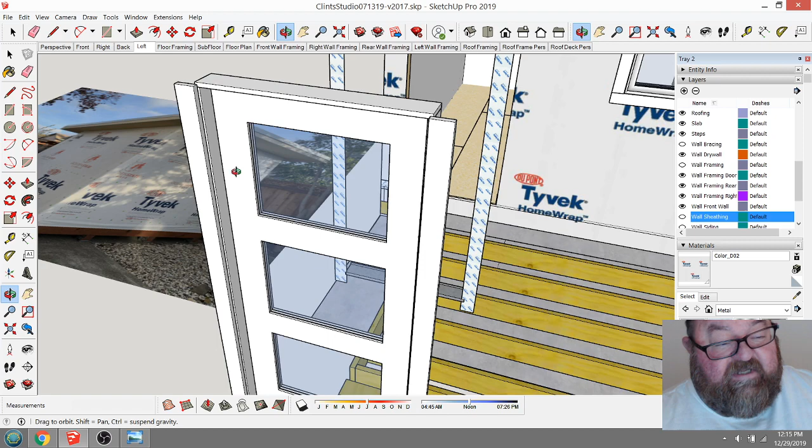A lot of these doors, like this Therma-Tru door, are very nice. It's fiberglass with a wood texture on it. Looks really nice, but it doesn't have nailing fins. We order these doors without trim on them, and we will put fiber cement 1x4s on there.

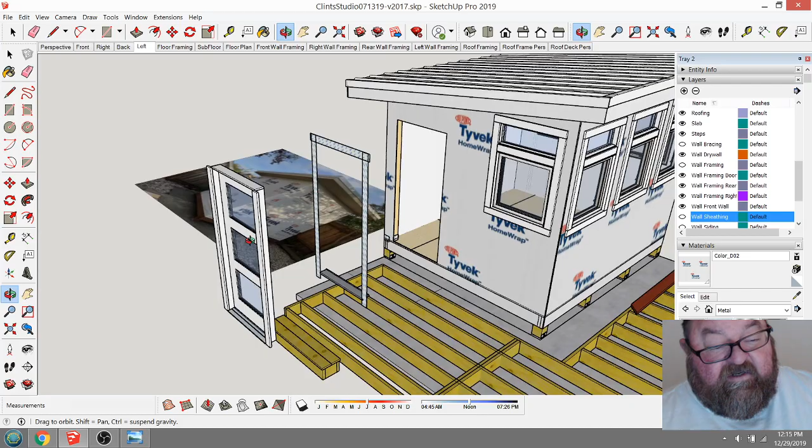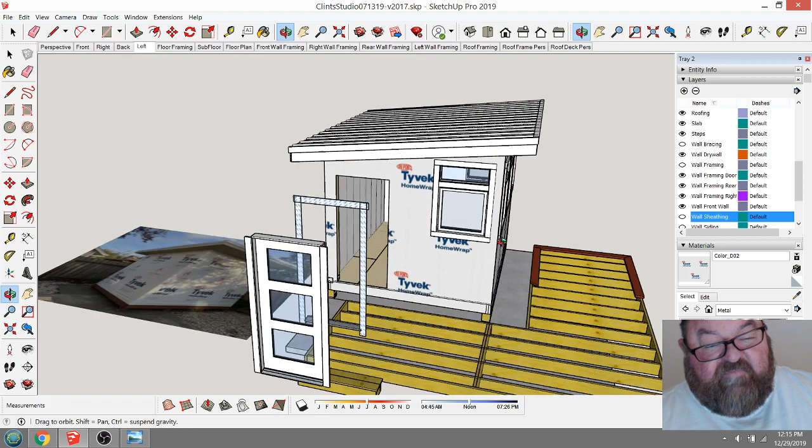This will all maybe be clear in a moment. I'm making this video for Clint. This is a project, and this is where he stands. It's an outdoor studio he's going to be using, and it's actually a little bigger than it looks. I've always been amazed how small it looks, but it's 10 by 12, the size of a regular office. So he'll have plenty of room, plenty of light, neat architecture.

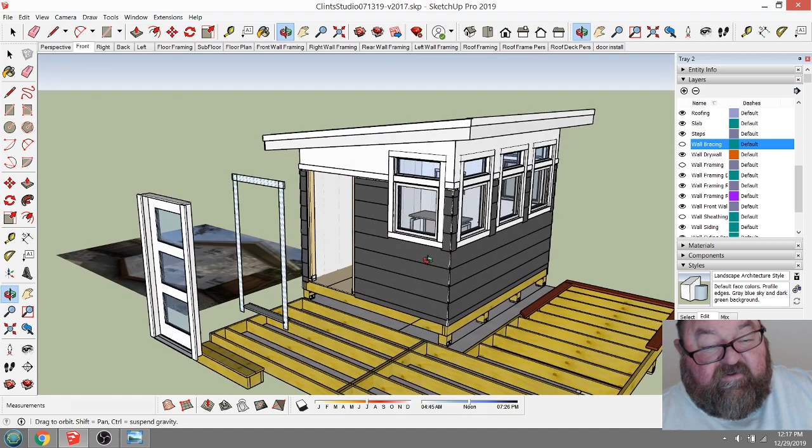So of course the door is not installed, but this kind of gives you an idea of what the siding and trim will look like. I just want to give you a rough look there at what it might look like. Now let's go back to our view.

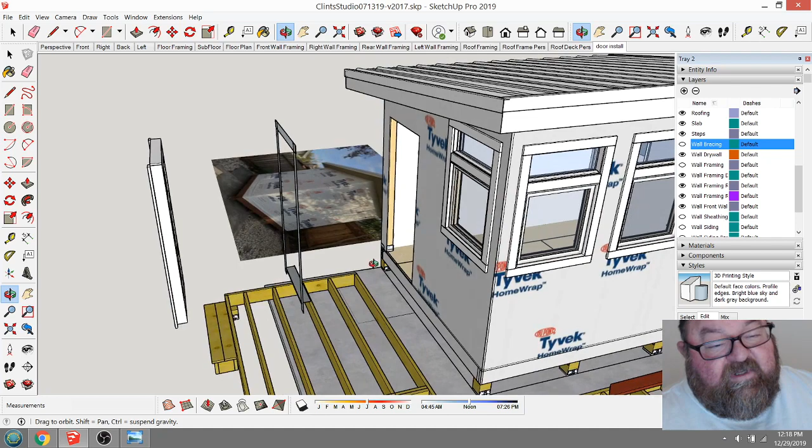So the issue here is, how do you install this door? And the short answer is there's three ways: the noob way to install it, the typical contractor way, and then there is the artisan way. I'm going to show you all three ways.

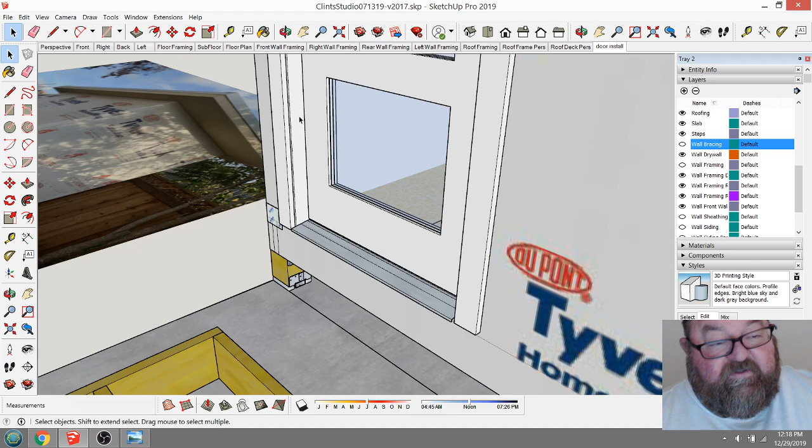A noob, and I'm saying noob because I'm just at a lack for a term, would just take this door and install it right on top of the subfloor. They would just slide the door in, put some screws in it, and put trim around it and go on. But that's not what I'm going to recommend.

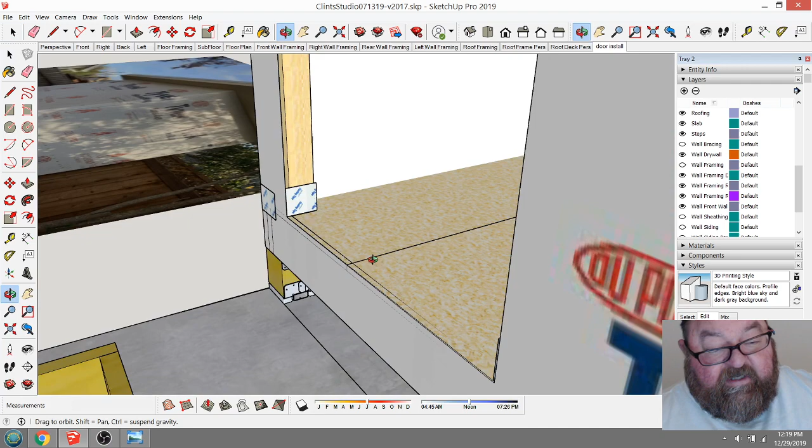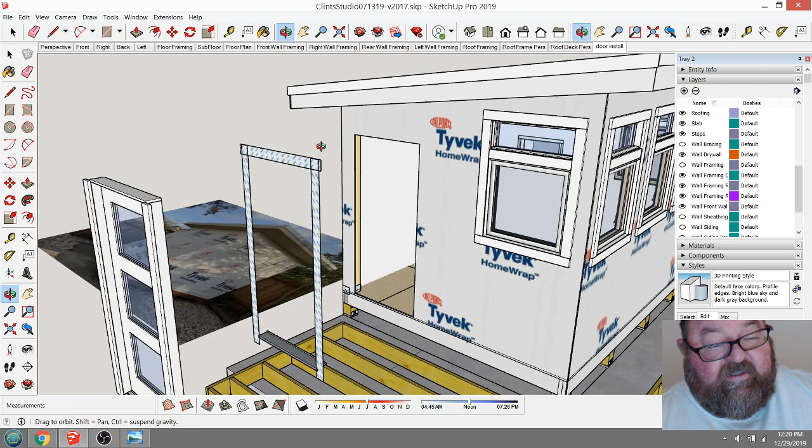The typical contractor method would be to just put some caulk here over the subfloor. Clinton has already got his Tyvek on, which he did a really good job of. This is honestly one of the most important things you can do, is get the Tyvek installed properly. Now on a door, the Tyvek tape is a little bit different. I'm going to show the windows in a different video. Clinton just wants to get the door installed, so I'm trying to help him out with a video for that.

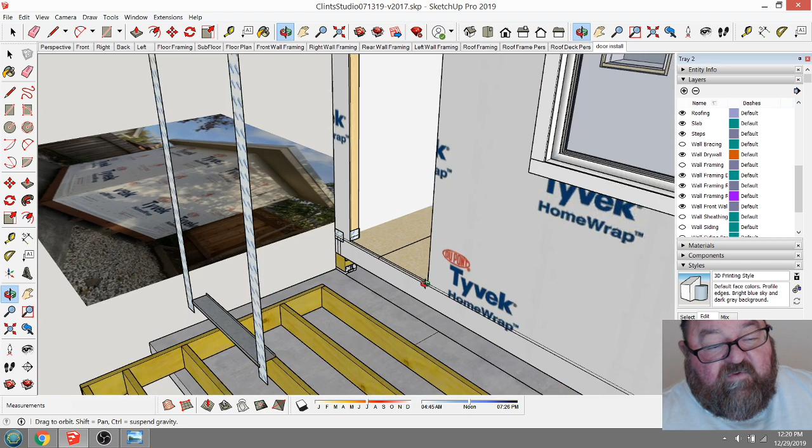So this is what I'm going to recommend, and there's actually two different ways you can do this, and I would consider both quality ways. The one way that's not exactly the artisan way, which I'll show you in a minute, is this method of taking the Tyvek flex wrap tape. Let me back this video up a little bit and I'll send you a link to this, Tyvek's video on how to do the flex wrap.

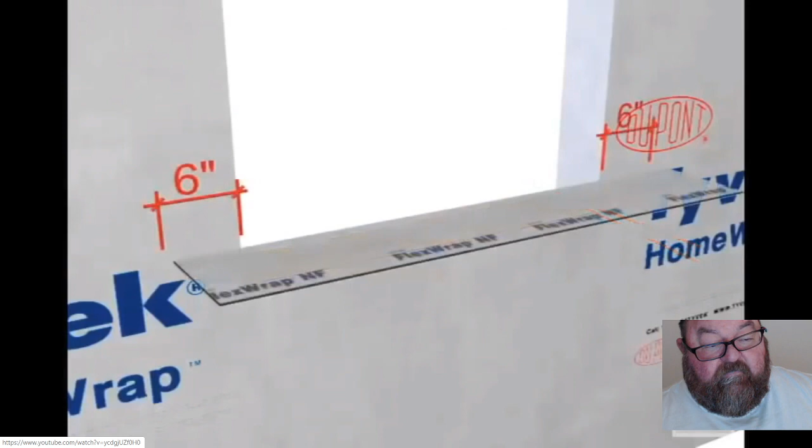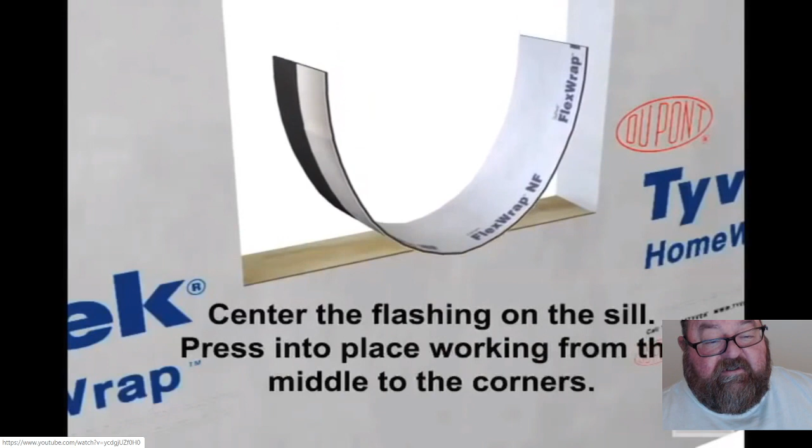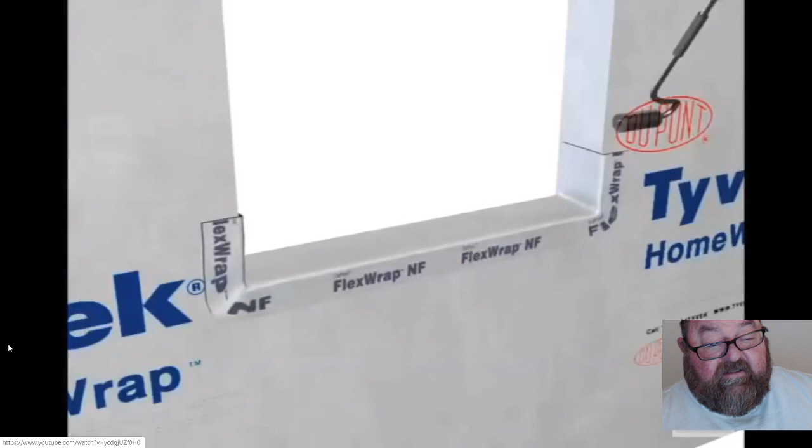So you just cut the flex wrap tape 6 inches longer on each side. It has a sticky back to it. You peel half of that off first and lay it in the opening. Then you take the rest of the backing off and press it. Here's where the fun starts: you take your hand and mold this corner, pushing it out first as far as you can, then molding it around the corner. It looks easy in the video, but it's not that easy, it takes a little practice. Then you take a roller and roll it like that. That's kind of the way that a decent contractor would do it.

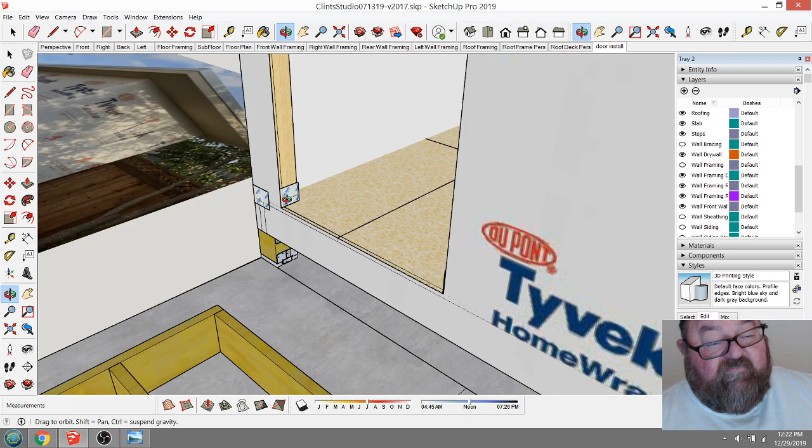Of course they're showing a window there, but you can do that, you can use that same product for the bottom of the door. That's better than not doing anything. And you can see remnants of my little tape job here. This one doesn't belong there, let me delete that one.

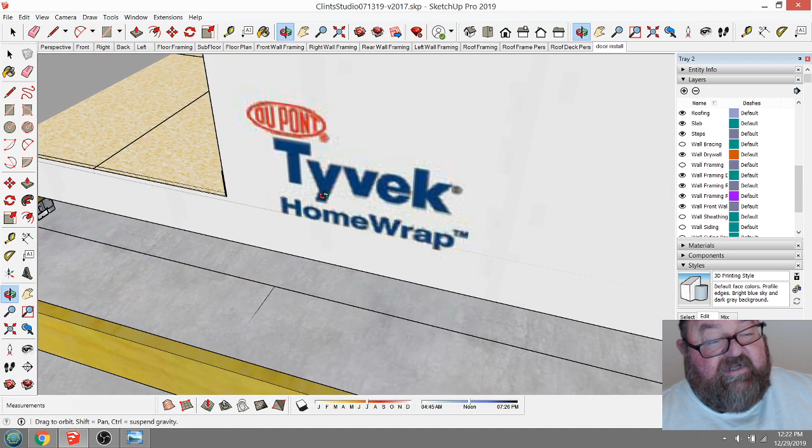One of the problems that we have with SketchUp is it will show lines sometimes behind a surface. So if you see this line across here, that's just something behind, a line ghosting through the Tyvek. This Tyvek is one continuous sheet, just like Clinton has it here. You did a good job with that.

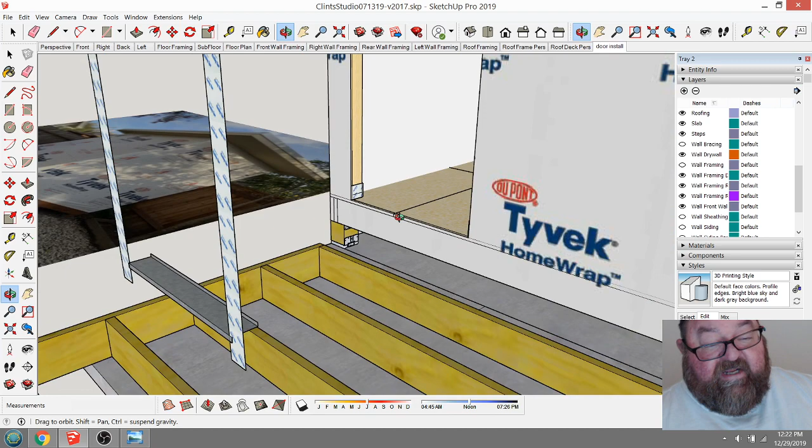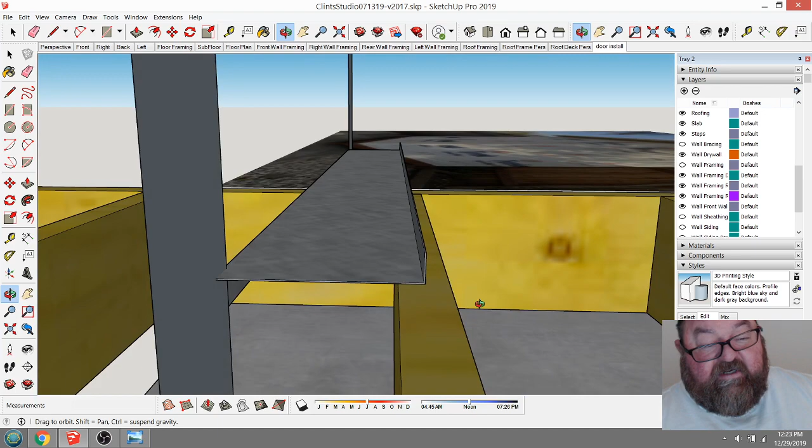So that would be your first option. The thing I don't like about that is that it's not really a pan per se. So what we do on ours, and this takes a little planning, is we have this pan made up from our local roofing and supply company. They have a sheet metal shop, and in a couple of days, if I send them a drawing with dimensions, they can make up this 26 gauge, and sometimes we do 24 gauge. I would recommend 24 paint grip galvanized pan.

And then that slides back into the opening.

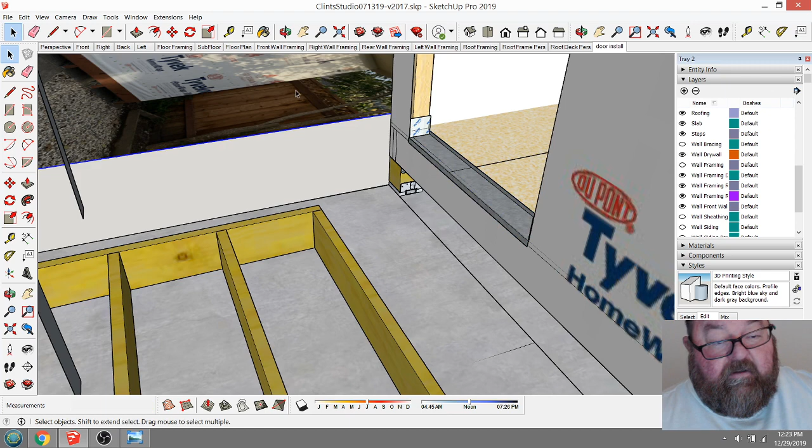Okay, so what that does is it comes out and laps over the Tyvek. Now when you cut this opening out on the bottom of the door, make sure the Tyvek is cut kind of flush. If you accidentally cut it too low, you can take a piece of Tyvek tape and recreate that bottom piece before you put this pan in there.

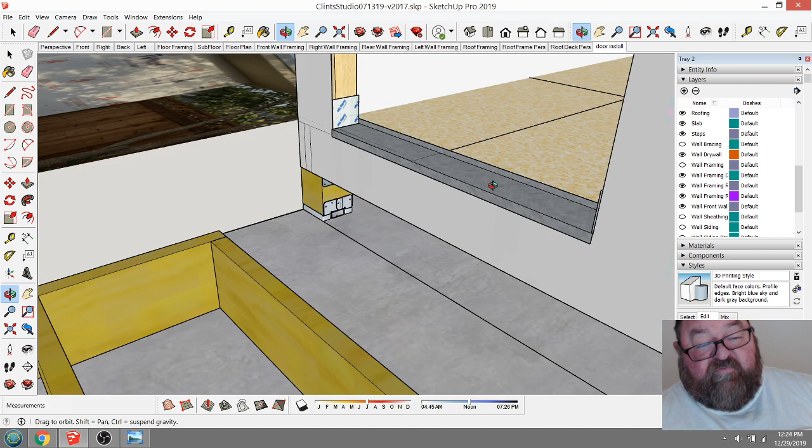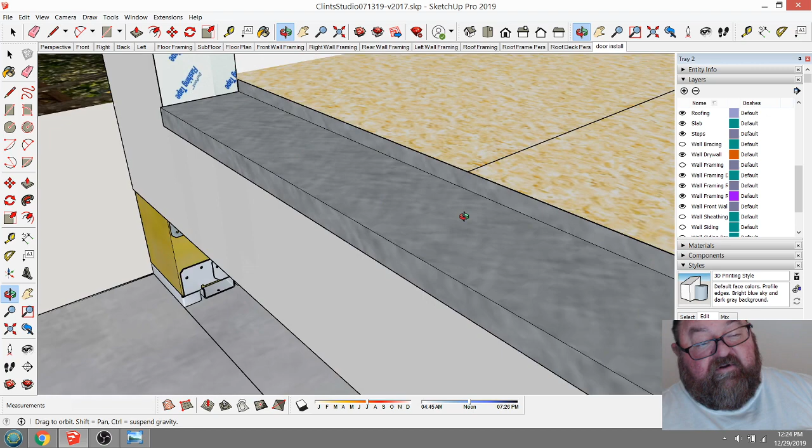Now the reason I like the pan is because it has this little leg on the back of it, so if water comes back in here, it can't go back any further than this. You can also use flex wrap tape and put a couple beads of caulk down through here, and that'll stop water from going back any further.

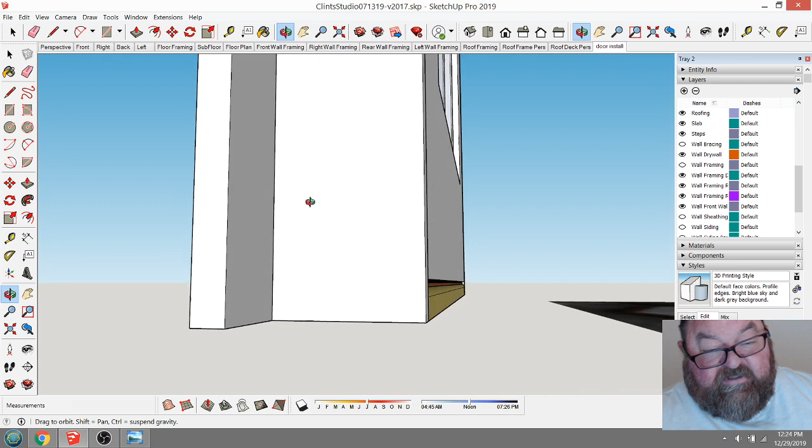But I really like this system. This is the way we've done our doors for maybe 10 years. The thing I don't like about the flex wrap is that these doors are kind of heavy, and they've got metal thresholds on the bottom - this part's metal, this part's wood. There's a composite material now they make these out of, they don't make them out of solid wood anymore. But you can actually gouge a hole in that tape.

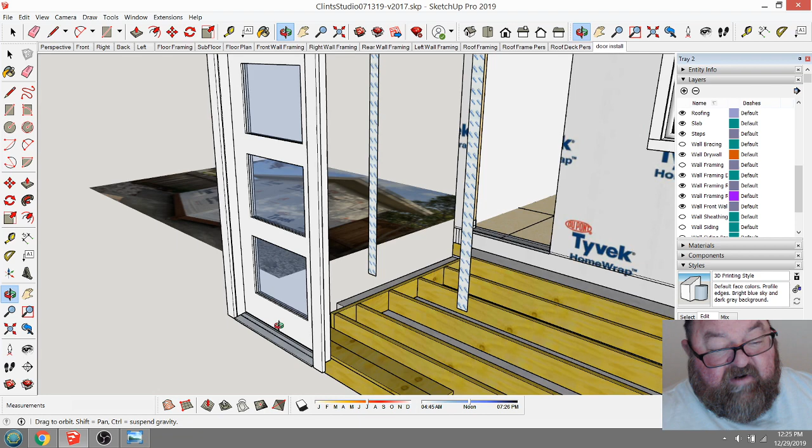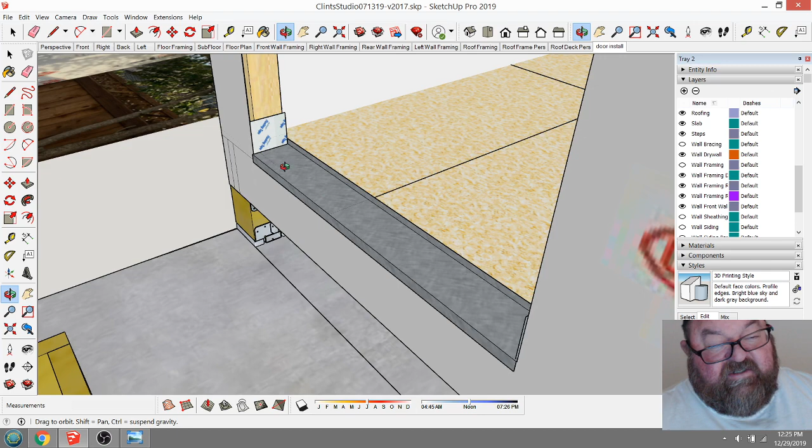Now if you're careful and you set the door in there nice and easy, and put a couple beads of caulk along the back to prevent water from running back - because I don't know how many times I've renovated homes where the owner wanted us to change out the door, we take it out and all the subfloor is rotted right there, because the contractor had done nothing but set the door right on the subfloor. I've got the deck pulled away here, but in a minute I'm going to push it back and show you part of the problems we run into with all this.

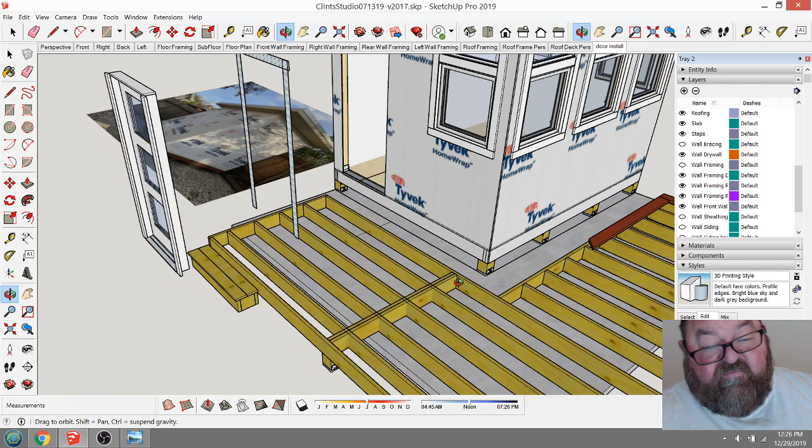And then I'm going to do another video just for the deck flashing. The flashing is a big deal, and really doing your flashing properly will add 100 years to your house.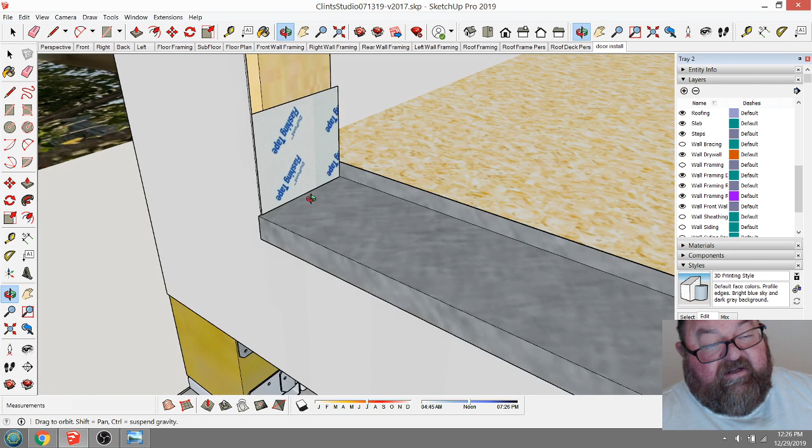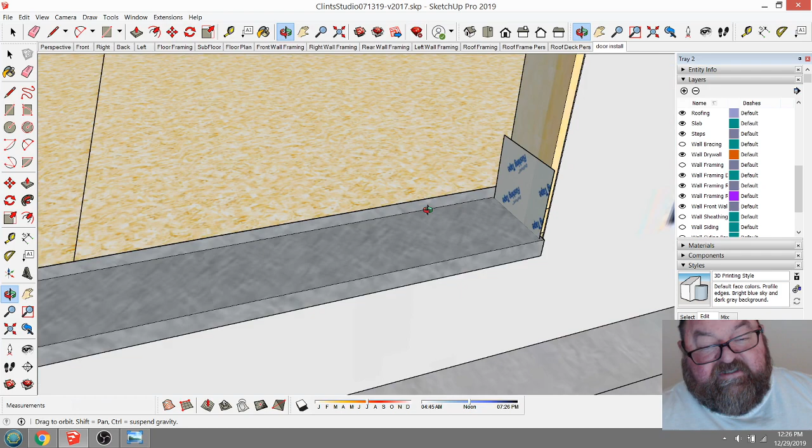So what I'm going to do now is create this little leg up on the sides - you can take a piece of Tyvek tape and put it here, then caulk this right here with some 100% silicone. In effect you've created yourself a little pan that you caulk, but you've got this leg coming up on the back. That goes against - I'll show you in a minute - the back of the door threshold.

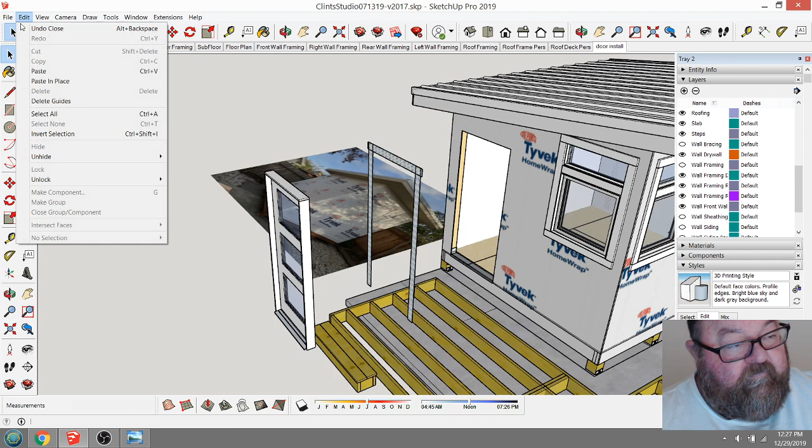So then what you would do is take this door trim off of it for now - actually, I'm not going to take it off, I'm just going to make it so I can set the door in place. I think I moved this out 10 feet, so if I move this back 10 feet.

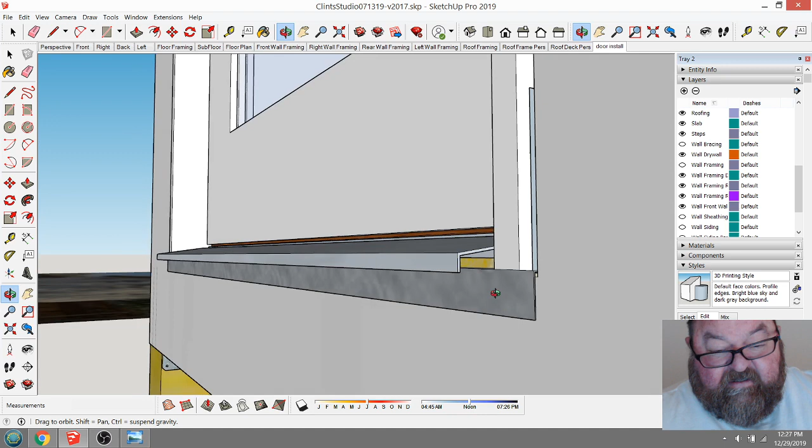So now you're going to set the door in place, and you can see that the door is setting on the pan and the threshold. This threshold, I downloaded it for this door - it's not 100% accurate, the composite material underneath comes all the way out to the edge, so there's not this void here.

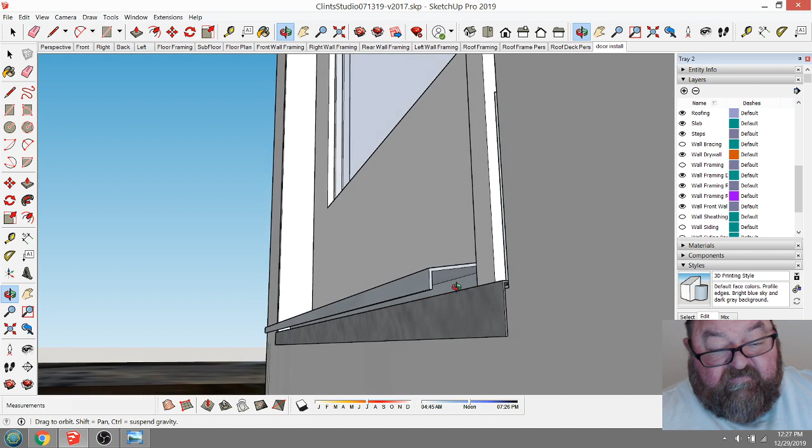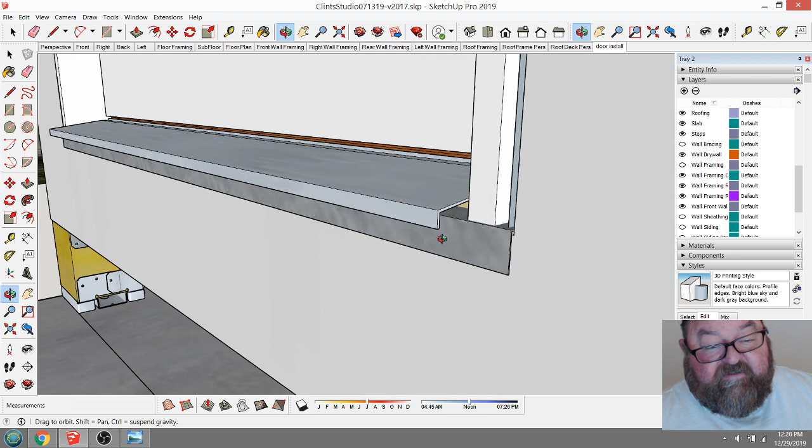So in effect what you'll have is this threshold sitting on top of your pan, and when the water comes and drips back, it'll hit that pan and drip down over the top of your Tyvek. You get the same effect if you use the flex tape - if you can get it in there and don't have time to have this 24 gauge paint grip galvanized pan made, you can use the flex wrap tape, just be careful when setting the door not to damage it.

So let's go in here, see if I can go inside and turn around - go in there, we go, without getting in the wall too much, and show you how this works. You see, now our pan is on the back side of our threshold. So water can't come back inside the house.

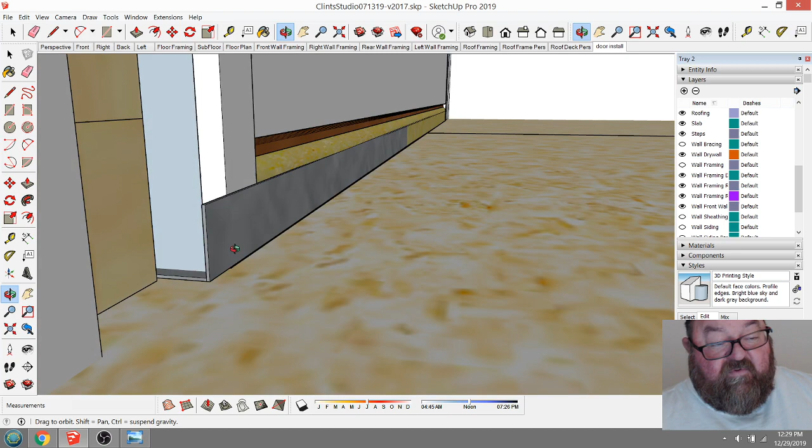Now this back leg is only 3/4 of an inch tall, so when you butt your wood flooring or whatever up against this, it won't show. If you're going to use a 12mm laminate in here, just make this leg a little bit shorter - it could be a 1/2 inch or whatever. You just need some kind of vertical up leg here to keep the water out. And you see that's the back side of our pan on the corner.

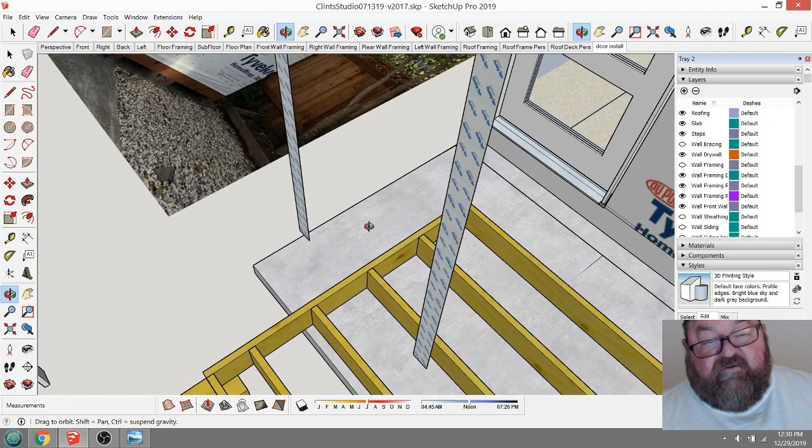Okay, so you don't even need to caulk this on the inside because you've got all this protection. Trust me, that 24 gauge or even 26 gauge - I like the 24 gauge - but either way, you're not going to have any leaks that way.

I'll show you what happens in a minute with all this water and stuff. So then, because these doors don't have flanges on them like the modern windows do, we're going to take Tyvek tape and make us a flange.

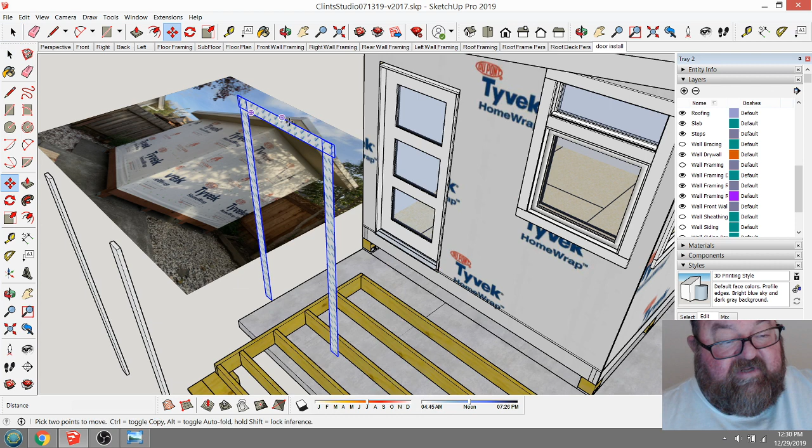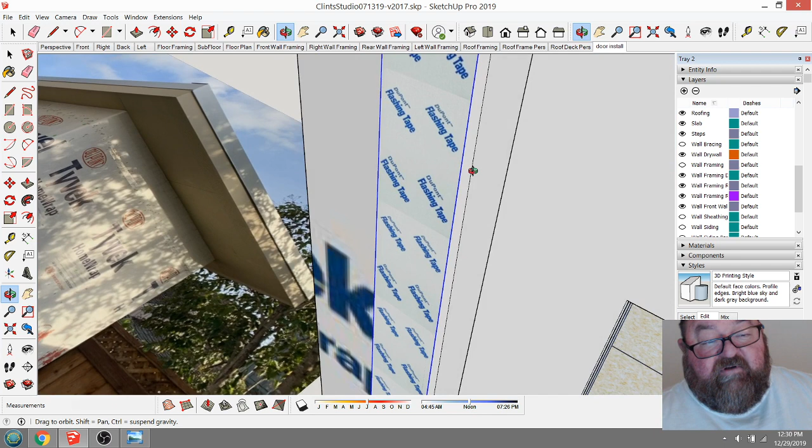Let me see if I can move this back. I think I took it out 5 feet. We're going to run that around, and it's going to overlap the jamb of the door, okay? And you're going to bring that to the margin that you're going to put on the trim. So basically, you can look at this as you're putting this tape in the same place as the trim.

Let me move it over and I'll show you. See the gap between the door - there's going to be more of a gap than this. There'll be probably about 1/4 inch there.

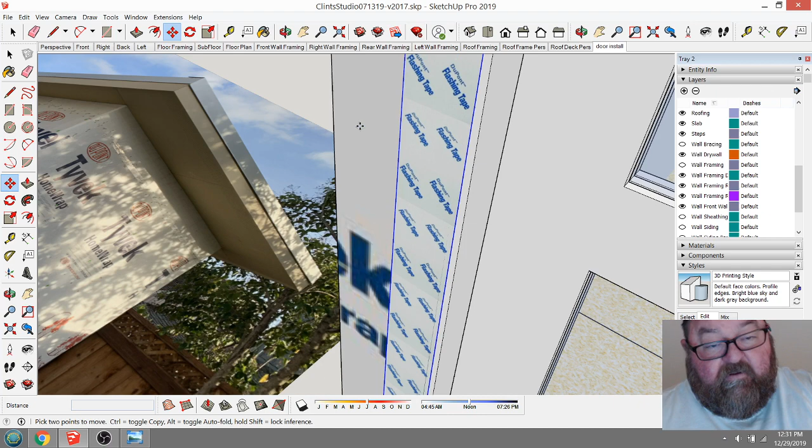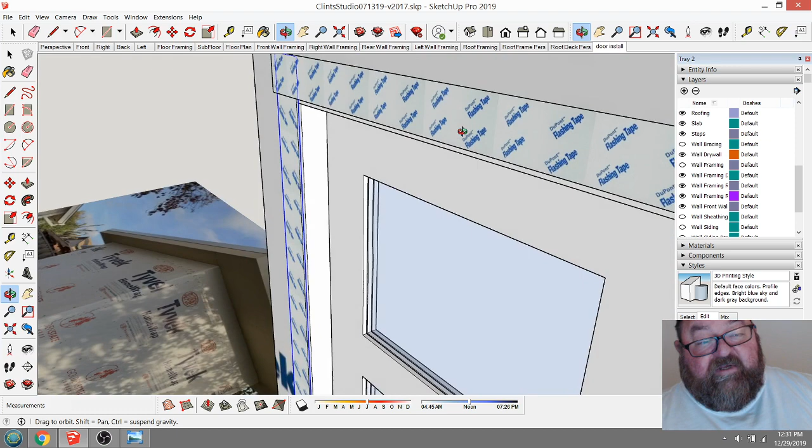The way you do this is you put your 2 side pieces on first, and you let them stick up 3 inches or so, and then you take a piece and go across the top. Again, it's put at the margin on the jamb that you're going to put your trim at, and that's going to cover that gap between the jamb of the door and the rough opening.

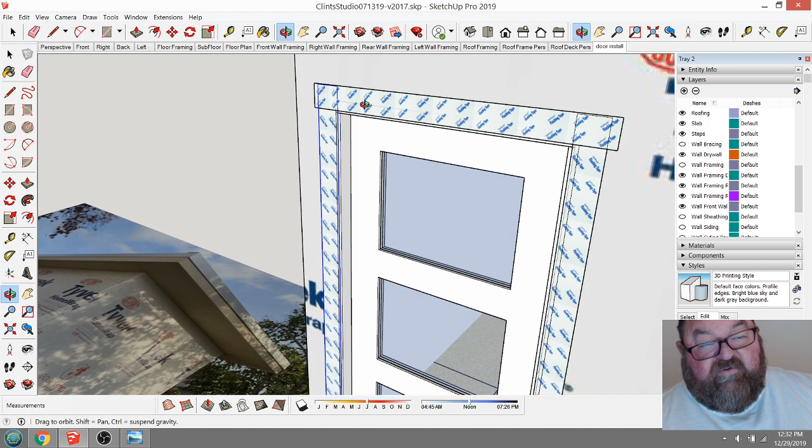What it's also going to do is create a place where when you start foaming, you take your non-expandable foam and start spraying it into the gaps around the jamb from the inside. It kind of gives this a backing. Okay, and then that's going to go down, and it'll just lap down some, and then you're going to put your trim on. I think that was 10 feet too.

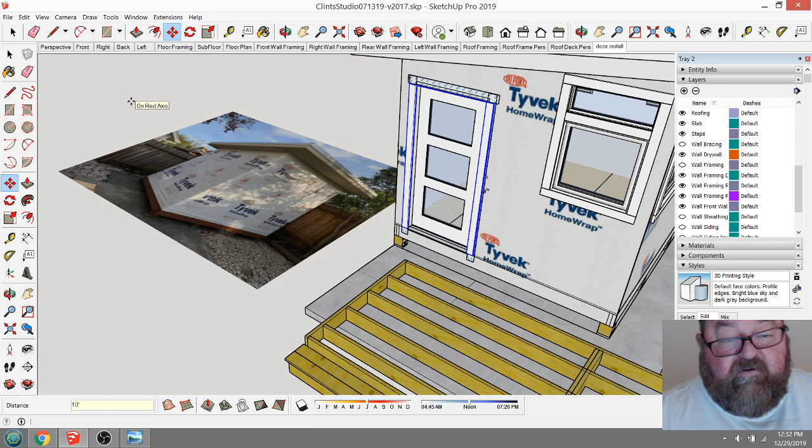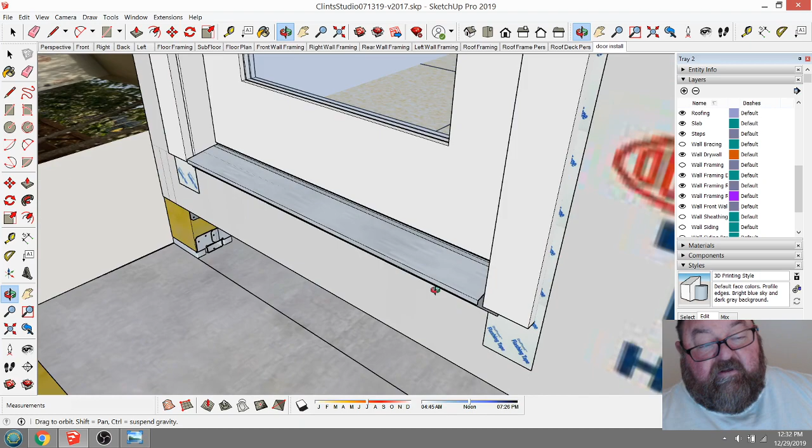10 feet, yeah. And I'll show you in a second why I'm not showing the top trim. But you can see now that trim is going to cover that tape, and you'll run a bead of paintable silicone down that joint right there. And that's really the best way - you'll never have any leaks.

Your framing at the bottom of your door and your subfloor will be good for a long time. Now in this particular project, normally you'd go ahead and put your top piece across here too, and then you would have Z flashing on top of that. But what we have, because of the architectural - where's our siding, wall siding?

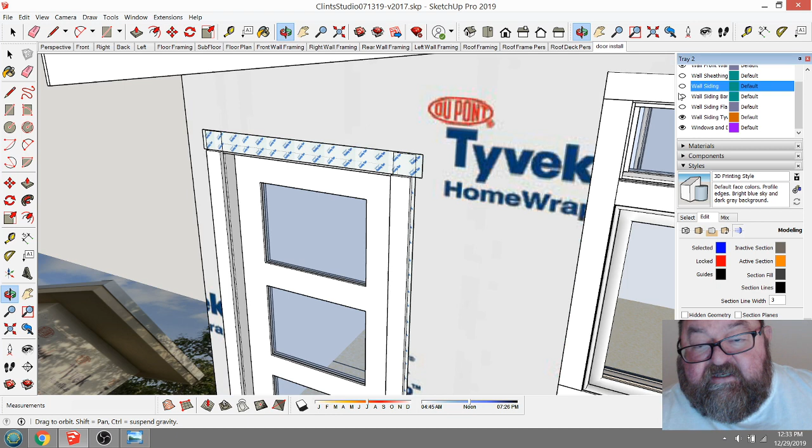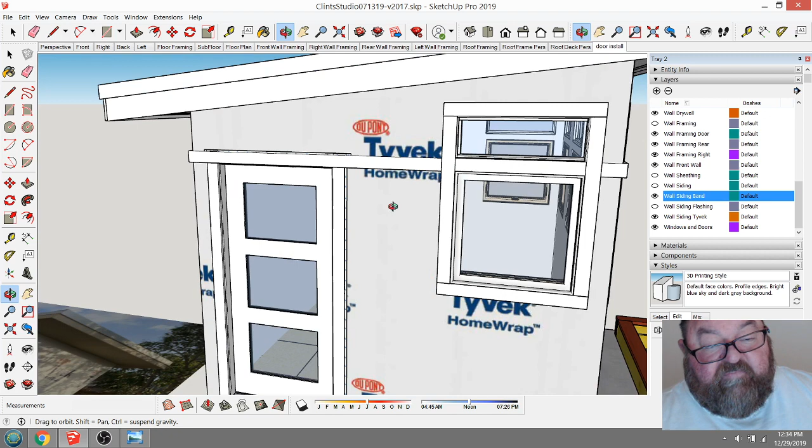That's that, and then we have this band that goes around. We've got too many layers. Here we go - so this band is an architectural feature that runs around the whole top of the door and around through the windows and all the way around the building. Again, this is just some cool architecture, and it gives you a place to change over the siding. Where is our siding? But that's the way that works, and all this is going to be just smooth Hardie panel up here, and this is going to be lap siding.

Then he's going to build a deck around, and this goes back - I think I moved that out 2 feet, 24, and then I moved it that way, 24... 24, yeah.

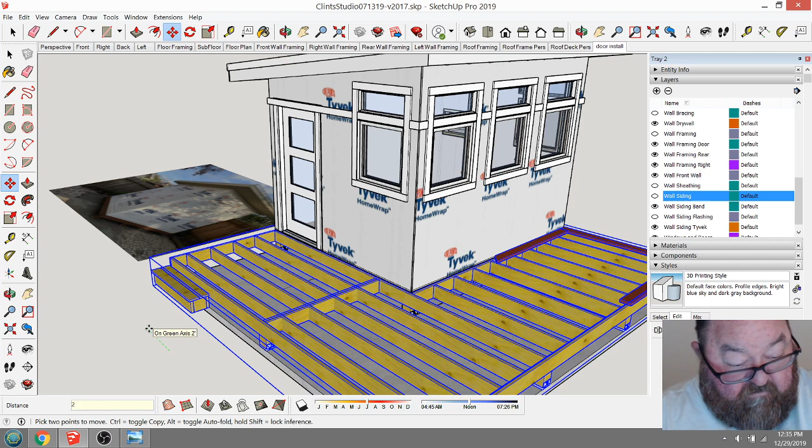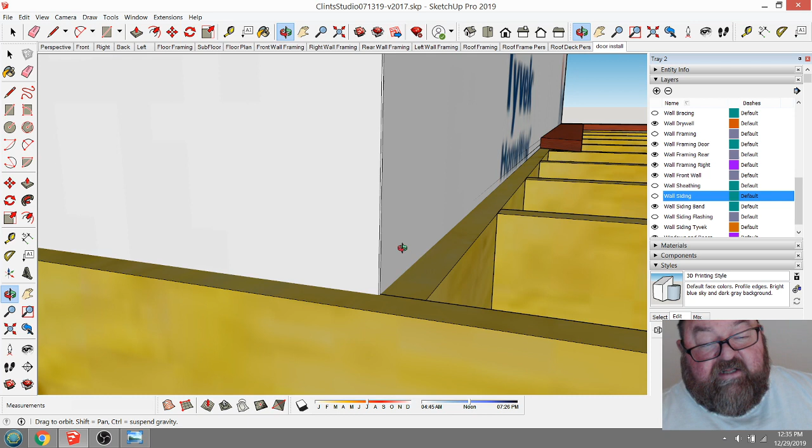And so you can see what happens is, he's got some redwood decking he's going to put down here, and I'm going to do another video on how to flash this. But in a nutshell, there will just be a 26 gauge L shaped flashing here that will go up behind the siding and come out over this. So if water gets down here behind this, it will come out and get dripped over this band, and it won't go behind that band.

But I'm going to make another video because I'm going to show how we're going to do the flooring and all that, and I'll show the windows, how they're taped too. So that's just a quick video for that, and I think Clint's doing a really good job there. He's basically a novice carpenter - his uncle is a little more experienced, and they're doing a really good job.

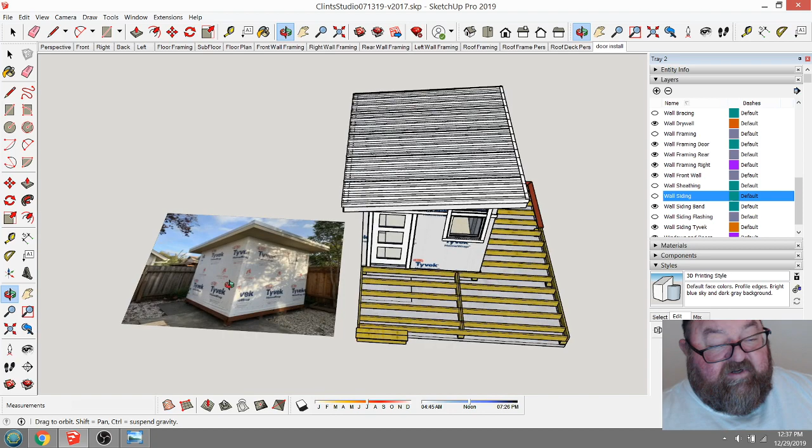You can see here, I'm trying to rotate the picture. They've already got the roof on, the soffits, the fascia, and they wanted to put the door in next. So I thought I'd make this video to help them out.